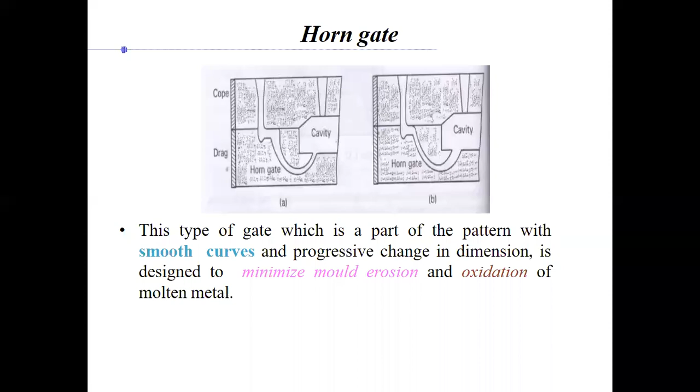Horn gate, and then you have parting type, which is the most commonly used gate and is a compromise between top and bottom gate. So the two extremes, as we saw: top gate, it's directly poured in from the top; bottom gate, it's poured in from the bottom. So midway you have this parting type. It's a compromise between the two, or a hybrid type, you can say.

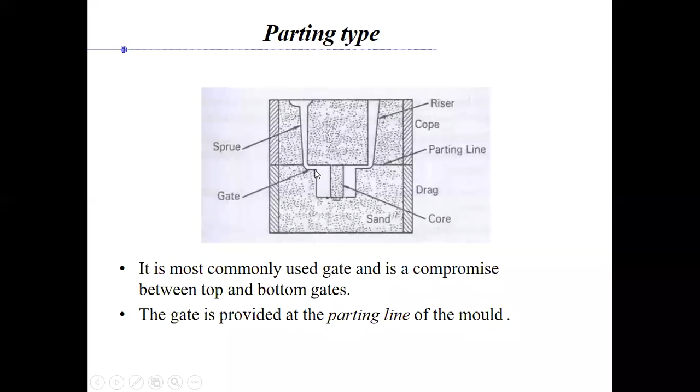The gate is provided at the parting line of the mold, as you can see. The gate is kept at the parting line. So it starts filling in exactly at the mid of the setup. Parting type gate. So those were the types. Now you see risering.

As we have seen, a riser or feeder head is a vertical passage made in the cope to store the liquid metal and supply the same to the casting as it solidifies. That's the purpose of the riser. Now, the different functions. It stores sufficient liquid metal and supplies the same to the casting when it solidifies, thereby avoiding volumetric shrinkage of the casting. To avoid shrinkage, this riser will provide that molten metal.

The riser must be kept open to the atmosphere and placed in such a location that it maintains a positive pressure of liquid metal on all portions of the casting it is intended to feed. It is kept open, and there is even another one which is not kept open all the time, as we will see in the different types.

And it is placed in such a location that it maintains a positive pressure of liquid metal on all portions of the casting. So the riser is basically responsible for that positive pressure, because that is the part where your molten metal can flow back inside. Once it has filled the mold cavity, it flows into the riser. So the riser is the only point where it can come back down to the mold cavity.

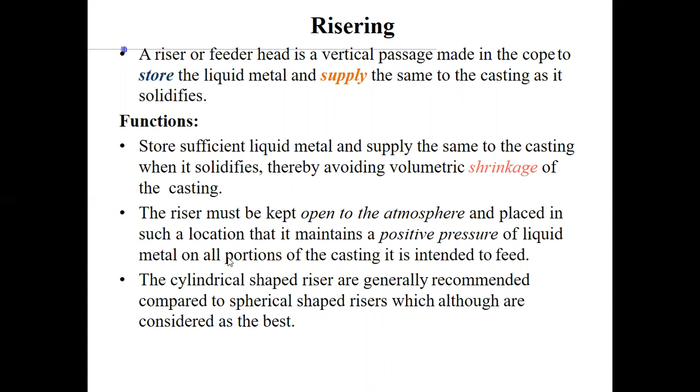Now you see the types of risers. We have the open riser. As the name suggests, the top surface of the riser will be open to the atmosphere. The open riser is usually placed on top of the casting. You have this mold cavity here, and this riser is kept above. So this riser is open to atmosphere. The atmospheric pressure acts directly on the molten metal in the riser. Once it has filled the mold cavity, it will come to the riser.

So the gravity and atmospheric pressure cause the liquid metal in the riser to flow into the solidifying casting. The gravitational force of the liquid metal and the atmospheric pressure will cause the molten metal in the riser to flow inside while this molten metal is shrinking.

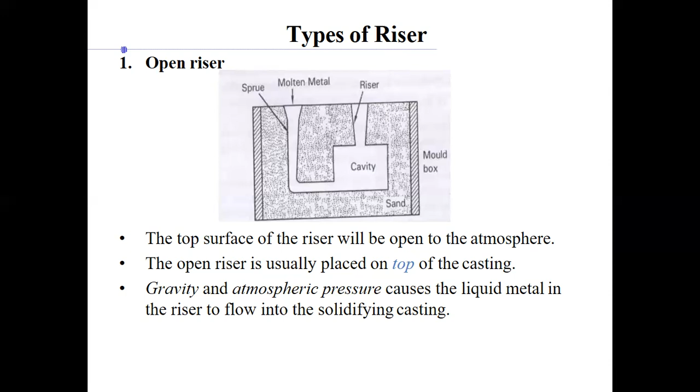And then the blind riser, completely enclosed in the mold and not exposed to the atmosphere. You can see here, this part is your riser. So you see that top atmospheric pressure is not there. It is enclosed inside. So that's what makes this a blind riser. It's completely enclosed in the mold and not exposed to the atmosphere.

The metal is cooled slower and stays longer, promoting directional solidification. It is cooling slowly, completely enclosed. So the riser is also enclosed, which ensures a slower rate of cooling, and this will promote directional solidification. The liquid metal is fed to the solidifying casting under the force of gravity alone. As you can see here, this riser, under the force of gravity, will go inside this cavity as it is solidifying.

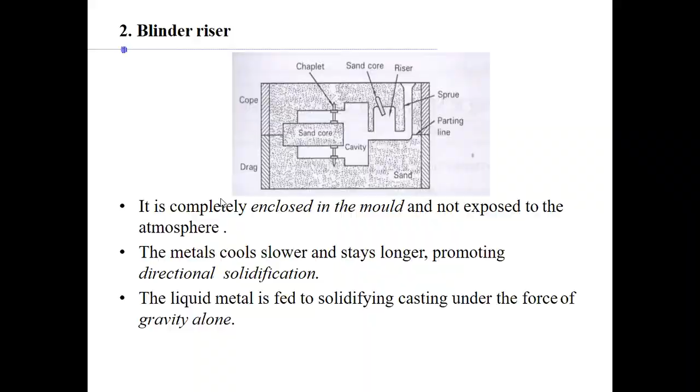Now, considerations for designing the riser. What are the factors? Freezing time is one factor. For producing a sound casting, the molten metal must be fed into the mold till it solidifies completely. So until it solidifies completely, there should be flow of this molten metal. Freezing time, that is the criterion. This can be achieved when the molten metal in the riser freezes at a slower rate than the casting, because it is responsible for supplying that molten metal, and if it solidifies first...

If it solidifies earlier than the casting, then the purpose is lost. So we have to ensure that this molten metal which is there in the riser should have a freezing time that is slower, the slower rate of freezing as compared to the casting, right? Freezing time of molten metal should be more for risers than casting, as we have discussed.

The quantitative risering analysis developed by Caine and others can be followed while designing risers. That is an empirical methodology developed by Caine, the researcher. So that is a quantitative analysis, right? It requires different quantities and basically is about numerals. It's not a qualitative one, it's a quantitative one based on dimensions and rules, etc. So that can be utilized to ensure the differential freezing time of the riser and the casting.

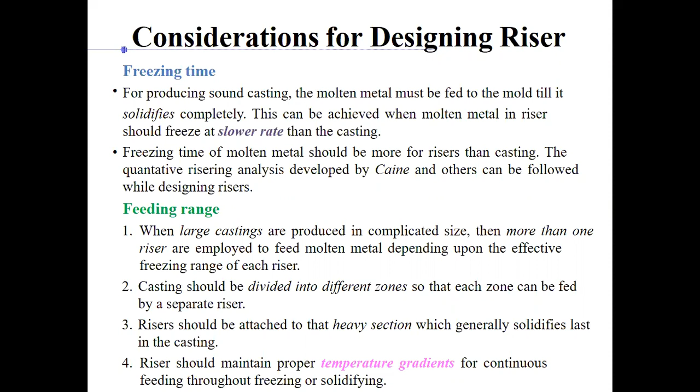Another thing is feed volume capacity. The riser should have sufficient volume to feed the mold cavity till the solidification of the entire casting, right? So sufficient volume of the riser should be maintained. The cross section and the height of the riser should be so designed that you have sufficient volume to feed the mold cavity till the solidification of the entire casting.

So you have calculations done that after 2 minutes, the mold cavity is completely solidified, right? So you should ensure that before those 2 minutes, there is sufficient volume in the riser to supply to account for the shrinkage, to compensate for the shrinkage. That is what is to be ensured, so as to compensate the volume shrinkage or contraction of the solidifying metal.

Metal is always kept in molten state at all times in risers during freezing of casting. It can be achieved by using exothermic compounds or an electric arc feeding arrangement. This allows for smaller riser size and high casting yield, isn't it? Because you want to ensure that the molten metal which is there in the riser shouldn't freeze earlier than the casting. How do you ensure that?

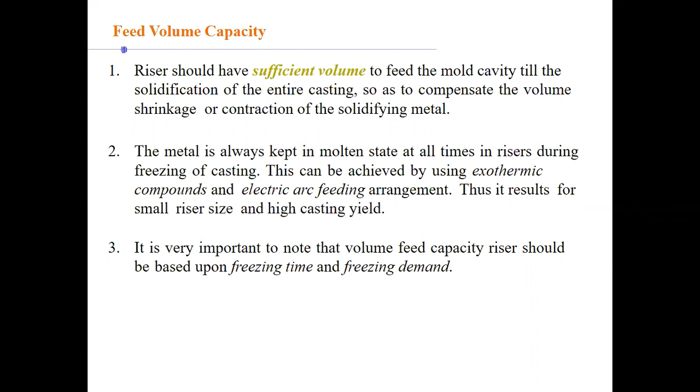Okay. So for an optimum riser design, the criteria to look at is that the molten metal, or basically the volume of the riser, should be there in the right amount, at the right place, at the right time, right? It should be able to supply the molten metal in the right amount, at the right place, at the right time. Because if it is not in the proper amount, then some part of the casting would receive the molten metal and some would not. So amount is important.

At the right place, right? Where it is required. If there is a section which is very thin, doesn't shrink much, and you're supplying more metal there, that's not required. So it should be ensured that only thicker sections or complicated features, wherever you have complicated features, there the shrinkage will be more, etc., like that.

At the right time also. Once it is solidified, if you're not supplying, it doesn't make sense, right? So that's what this optimum riser design is. It should be able to supply the molten metal in the right amount, at the right place, at the right time. Key factors to look at. So that is your riser design, right? That we have seen.

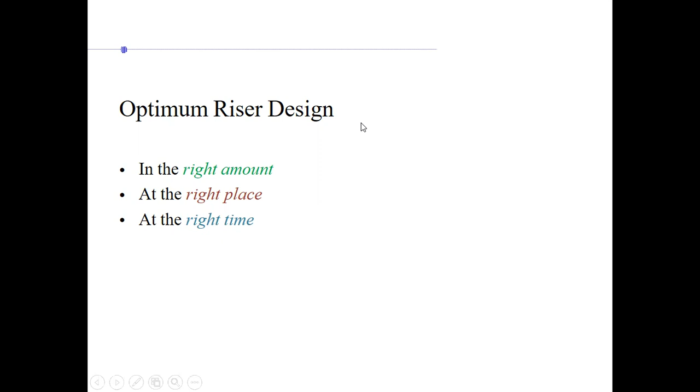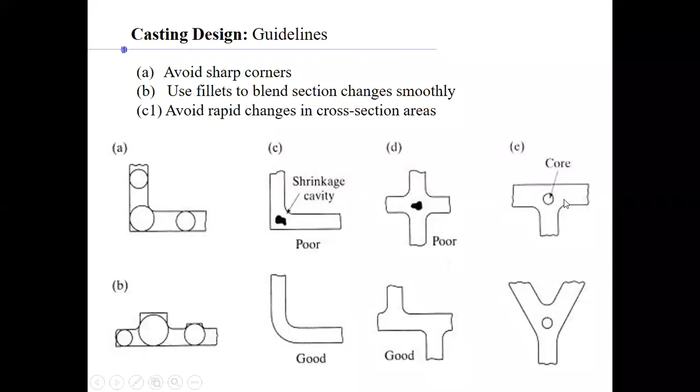This is a poor design, this is a good design. This one is a poor design: you have a lot of cross sections merging. So you have split them into different intersections. This one is a good design. You can even plot like this, so you don't have much drastic change in the cross sections.

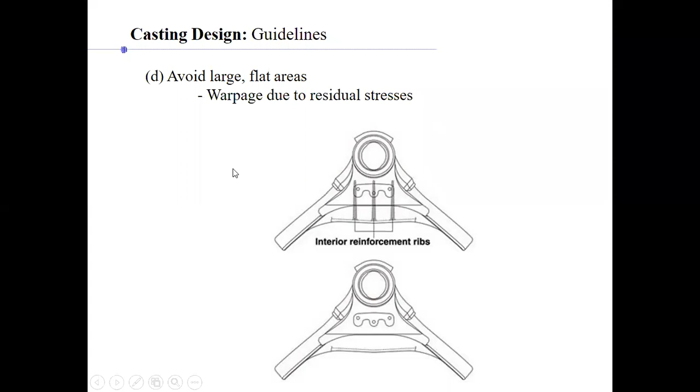This is why we avoid large and flat areas. If it is unavoidable, then you can keep these kinds of ribs so that you can avoid this warpage due to residual stresses. Provide drafts and tapers. We have already discussed why to provide a draft and taper. Instead of having this straight portion, you can have it tapered, so there is ease of removal. This angle is called draft angle.

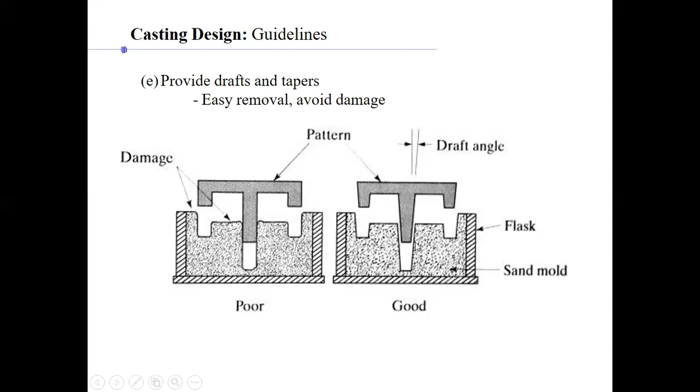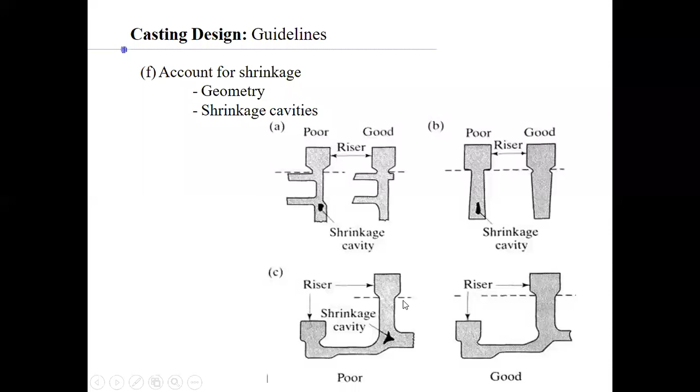Account for shrinkage: geometry and shrinkage cavities you see here. For avoiding this shrinkage cavity, you are providing proper cross sections. Here also, shrinkage cavity, trying to have a properly channelized molten metal flow. Here also, they have decreased this cross section, basically the throat, so that there is not much area lying inside. More surface area is what we are ensuring here, to avoid the shrinkage cavities.